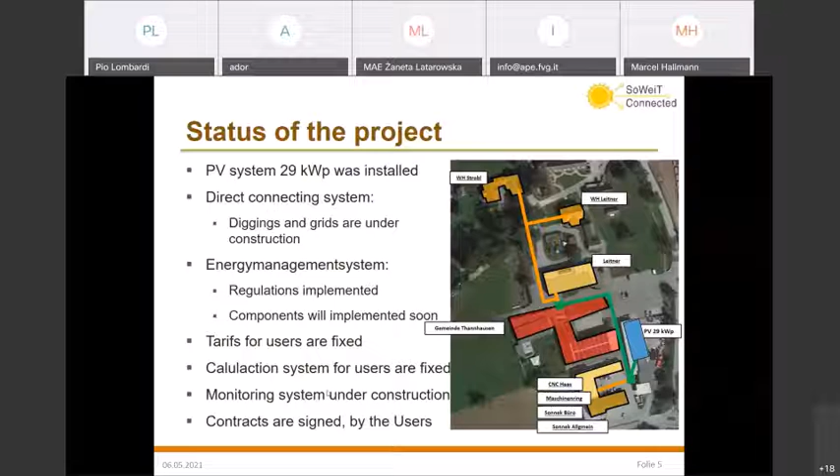What is the electricity consumption of each user, or what can they get from the PV plant? They can get about a quarter of their normal electricity consumption. For example, one company normally has an electricity consumption of about 12,000 kilowatt hours per year. So they can get about 3,000 from their own grid, and the rest of the consumption they get normally from the energy grid of Styria. So we have 100% self-use of the PV from the municipality, sharing through 7 users.

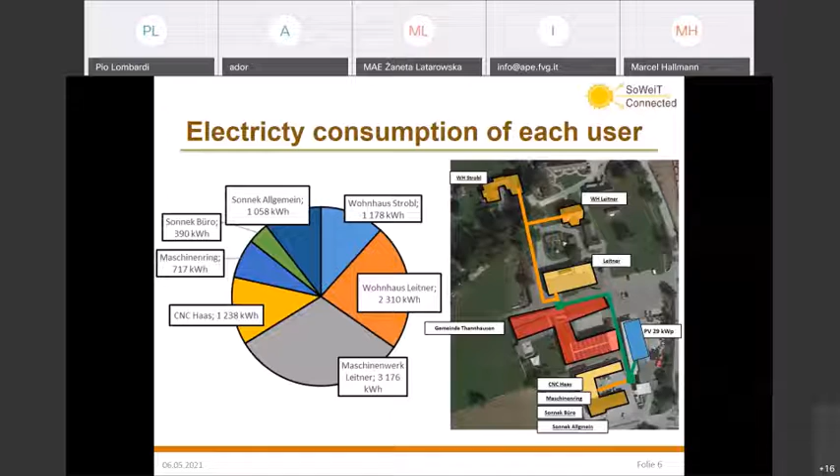The tariff which we calculated for each user will be 8.14 cents per kilowatt hour, excluding taxes, so it's much lower than they pay for their electricity coming from the official grid of Styria.

What are these savings in euros per year for each user? It depends, between 25 euros and up to 170 euros per user, which they can save per year on electricity costs. Our first idea was to have each user invest a bit in this system, but they didn't want to because the risk was too high for them. They weren't sure if the system would work, so we fixed it so that they invest nothing and get this 8 cents per kilowatt hour from the system.

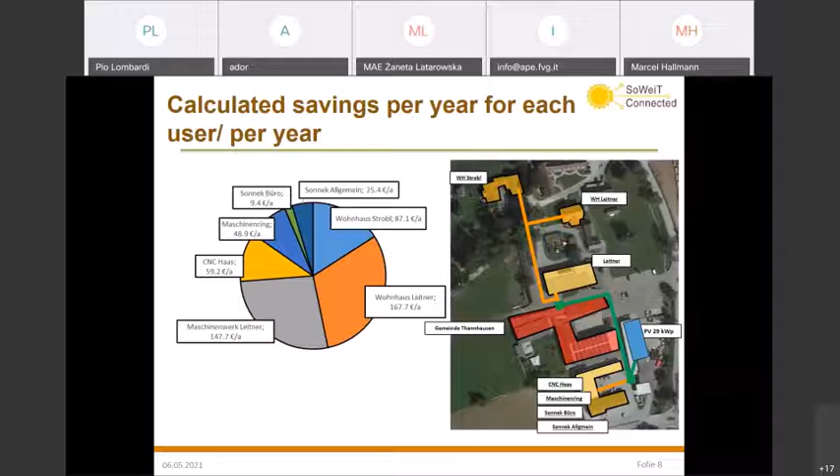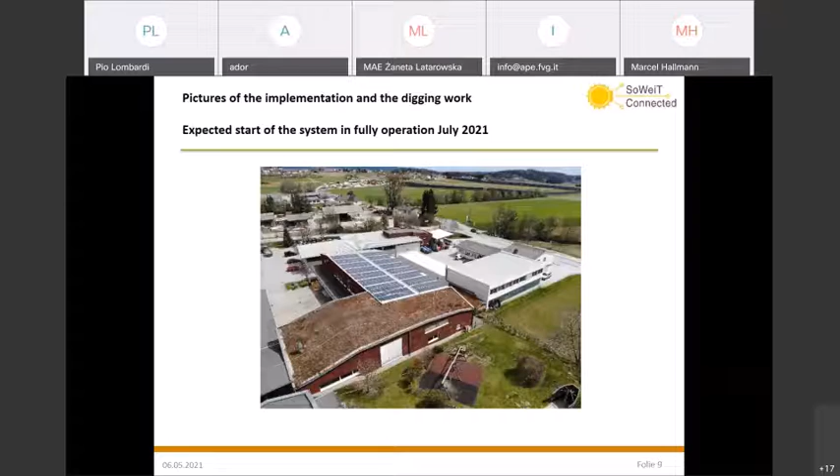Some impressions from the Thannhausen area, the PV system and the diggings. Now it's finished. We also have water lines, district heating lines, and glass fiber cable, which were also connected to the households through this project. In the next picture, it's at number 7, because every house has its own grid coming from the PV - 7 own grids to each user. That is the law - you have to provide each user their own grid from the PV to their households.

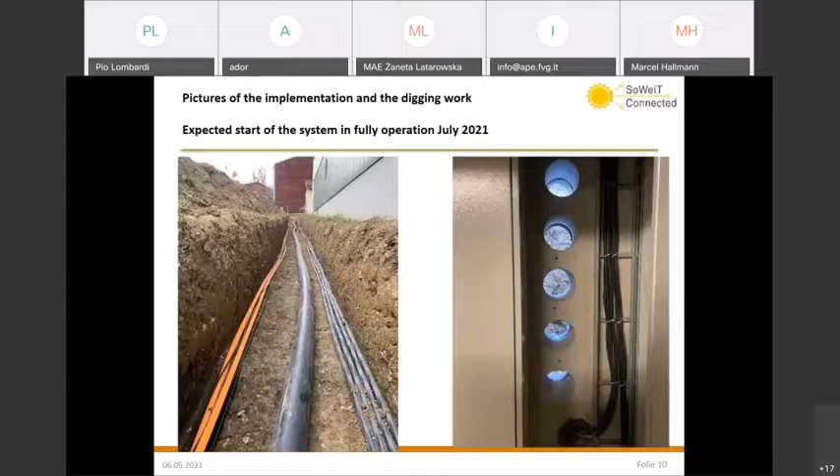There you can see the PV panels and the new 29 kilowatt peak system, which was finished 2 days ago, and we hope to get it into full operation by July 2021.

One of the main aspects that interests investors or users who want to install a storage system is the business models - which kind of business model may be developed for storage systems. This presentation deals with that. First, I'll give you an overview of why we need storage systems. I think that's obvious.

We know that in Europe we aim to decarbonize the power system, meaning we will generate electricity, but also other energy forms like gas or heat, using renewable energy sources. Most of them are volatile if we consider wind and sun, and therefore integration into the energy systems - electrical, thermal or gas - is not so easy because of that volatility.

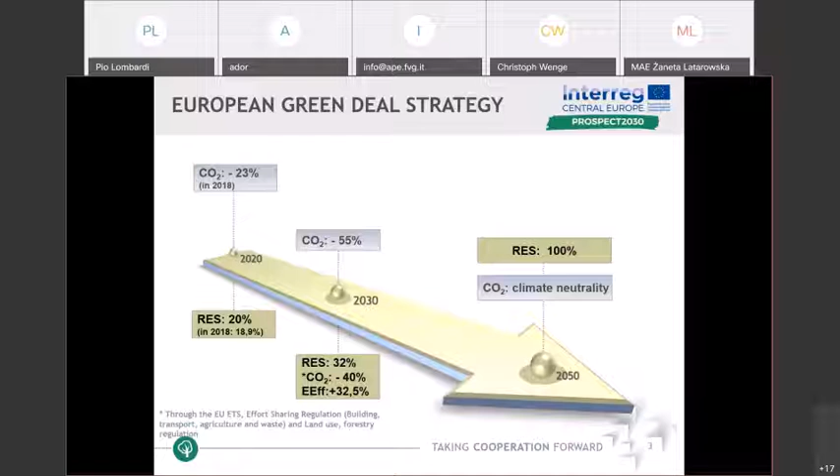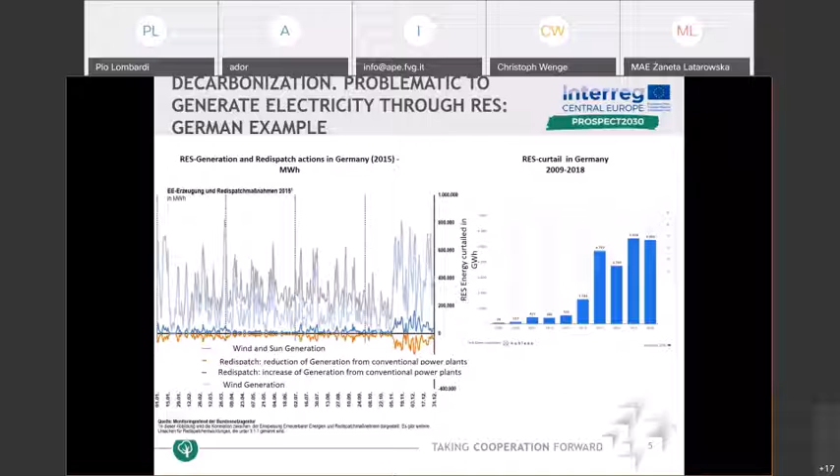Therefore, the idea is to use storage systems for storing such amounts of energy which could not be integrated, and to avoid using conventional technologies in this case, because by 2050 we will not have any more conventional technology for integrating or compensating for the volatility from wind and sun.

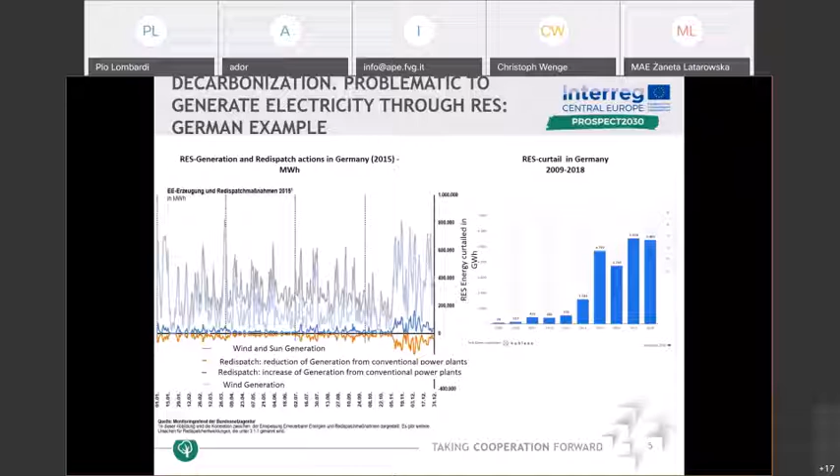So, among the scientific community, we have three solutions that are mostly researched. One of them is to have active consumers, which means consumers, mostly industrial ones but also residential, which actively participate in the integration process of volatility, which means that these consumers have to change their consumption behavior depending on when the power is generated from renewables.

Another solution may be the multi-energy system, so having a holistic approach of what energy means: integration of the electricity network, gas network, mobility network, heat network, all that should be integrated as one very large system. And the last one is the integration of a storage system. Of course, the storage system may be part of a multi-energy system and may also be used for active consumers.

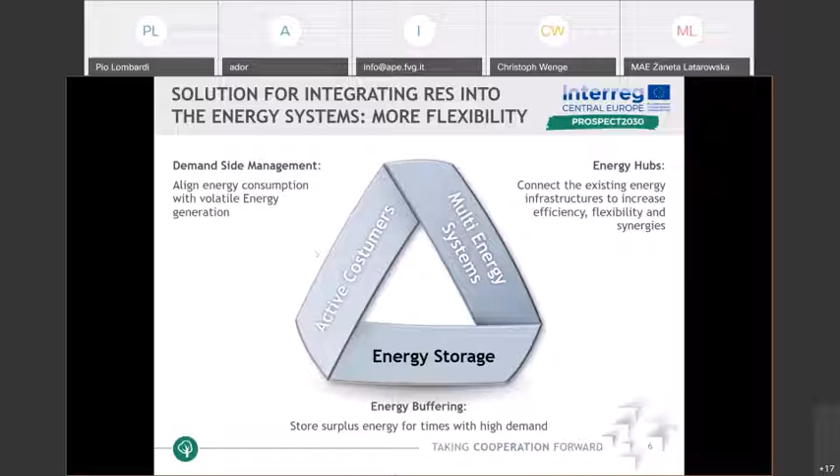So generally, storage systems are classified according to two criteria, namely the energy that they can charge and discharge and the power that they have. According to this charging and discharging power and energy, there are mostly two applications. The first one is power application, which means I use a storage system for supporting the grid operator to keep the network stable or the frequency near the set value, or energy application, which means that I use a storage system for storing a high amount of

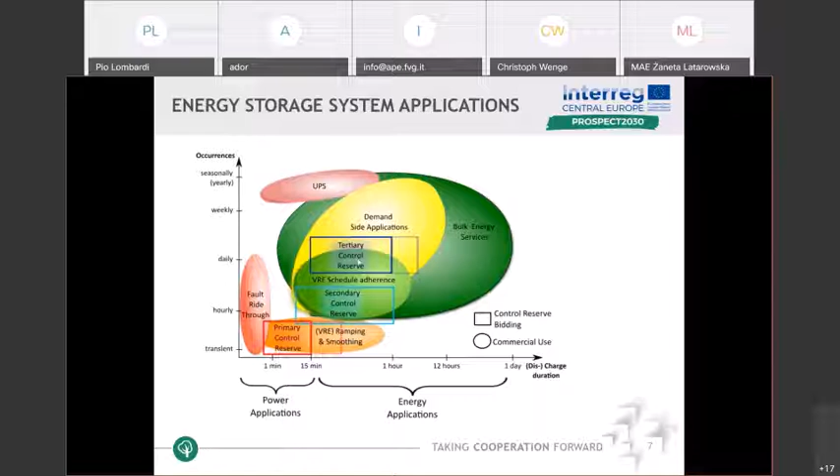energy that I cannot integrate in the grid at the time in which I could generate more energy, and I discharge this amount of energy at the time that I don't have enough generation from renewables. And you see here many sub-applications that can be applied, like demand side management, bulk energy services, tertiary control, primary control, etc.

Among storage systems, we have the first one, which is the most used technology, pumped hydro storage. Such a technology is mostly used worldwide. It's also old. We have several gigawatts of installed capacity. However, at least in Europe, we don't have any more large spaces for installing new pumped hydro. And besides that, the social acceptance of the population is not so high. So therefore, at least in Europe, installing new pumped hydro is very limited as an option.

Another technology which we may use is the compressed air storage system. We have worldwide two such plants, one in Germany and another one in the US. Both these storage plants are using the diabatic compressed air storage system, which means that I compress air, consuming electricity, of course. I store air inside caverns, and when I have to discharge and generate electricity, I also burn fossil fuel. This is the diabatic application.

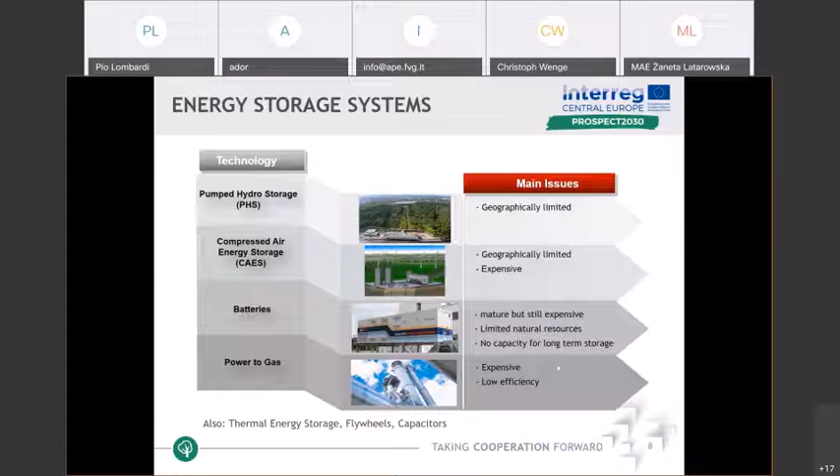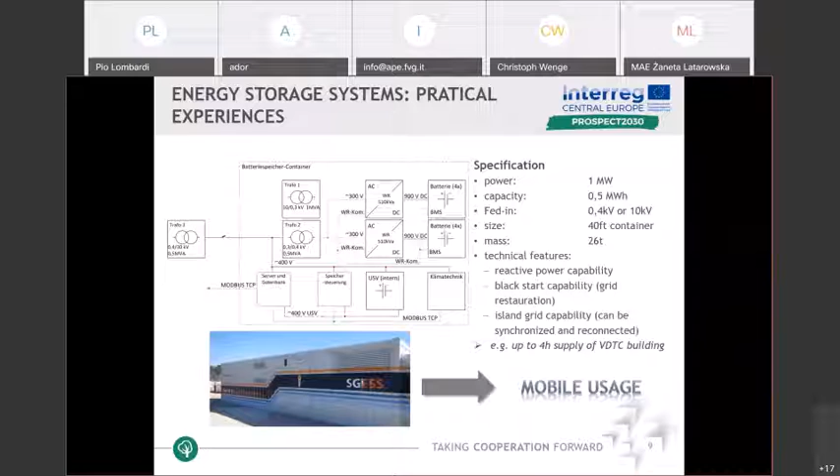So which kind of business model can we imagine for batteries? At Fraunhofer, we bought many years ago a large battery with 1 megawatt and 500 kilowatt hours of energy capacity. Such a battery may be connected at two different voltage levels. And we have used such a battery in different practical applications. From that, we have learned whether a business model may be exploited or not.

One of them is here in Neuhardenberg, which at that time was the largest European photovoltaic plant. You see here, it is near an old airport. It had an installed capacity of about 150 megawatts. And for this photovoltaic plant, we have integrated our large battery, so 1 megawatt, 500 kilowatt hours, for different applications, which I'm going to show you now.

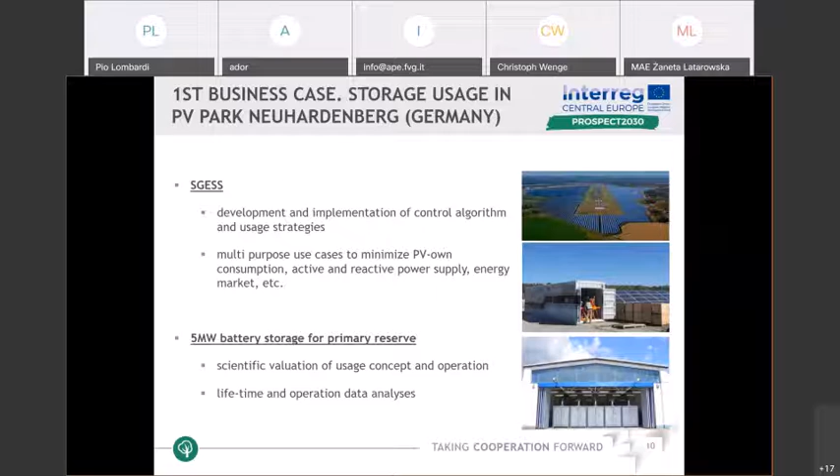So the idea was to use the battery for supplying electricity during the night. You have to imagine that this very large field also needs cameras for security purposes, for observability purposes, for controlling, and such cameras need a lot of electricity, summing all the cameras that they have. So the idea is to store the electricity during the day in the battery and supply the loads during the night. It was the first application.

Now, the second application was at the network point where such a photovoltaic power plant is connected. The system operators many times have to curtail the generation, so the power plant could not feed into the grid. So the idea is, instead of controlling the inverters or the power plant and cutting the power, they charge the battery. So the system operator does not receive the power as predicted, and the power, instead of being lost, is charged inside the battery.

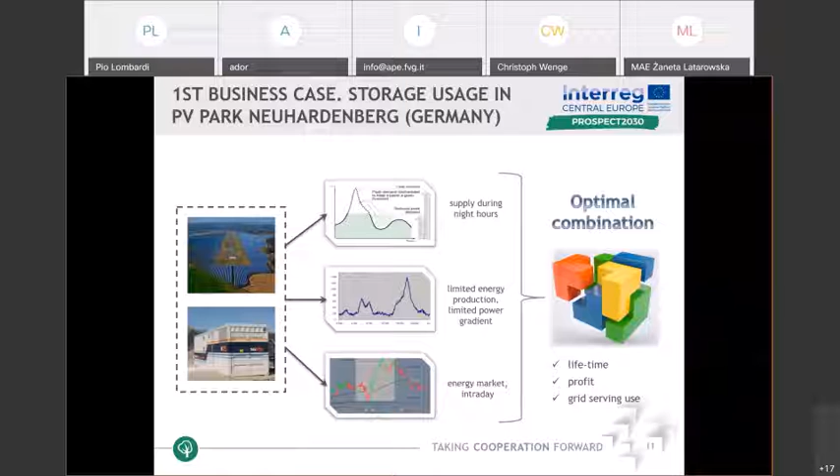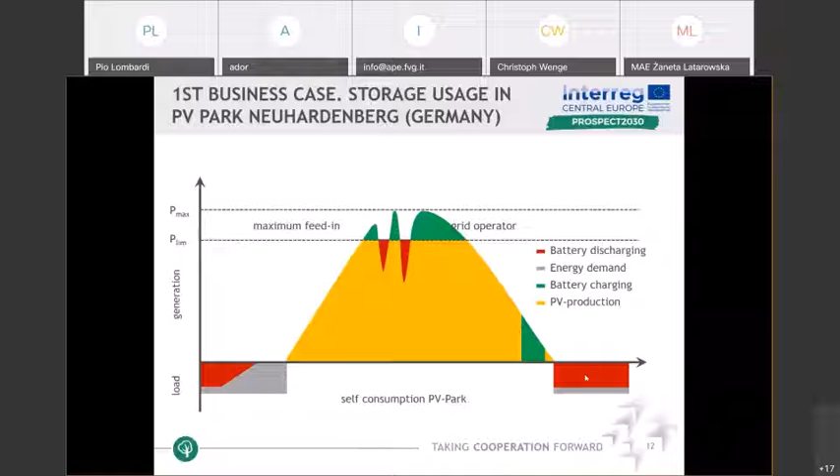So here you see just the idea of how it works. If the system operator is not able to receive power, the surplus which could be generated is charged. The power before sunset is charged for the night application, and this is the main idea. So for that example I have shown you before, the photovoltaic plant had not invested in the battery. These three business models were not so attractive from the economic point of view to justify an investment. Not yet.

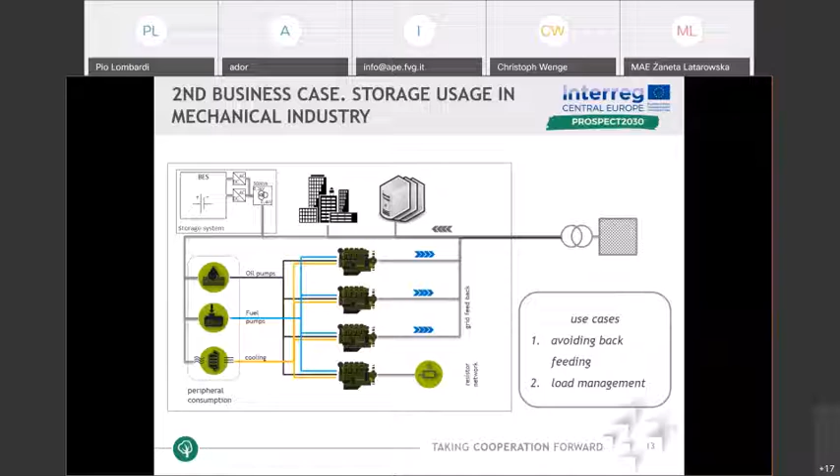Another business case that we have also investigated is the utilization of a storage system inside the mechanical industry. This is the example of an industry which tests large diesel generators for heavy duty applications. They make this kind of stress test in order to understand the robustness of the diesel generator. And the idea is, instead of wasting the mechanical energy into heat, to convert the mechanical energy into electricity and store it inside the battery. So this kind of application, which seems interesting from the technical point of view, has not been interesting from the economic point of view, and has not justified the investment in the battery.

The last one which may be interesting, which we have investigated from the theoretical point of view, is the business model called sharing economy. What does it mean? It means that if I have different users, which may be industrial users, commercial or office users, or generation companies, located near the same place, I can install a storage system which may supply different services for different users. The idea is I share the investment cost among the users, and my applications increase. So I have more applications, and therefore I may generate more revenue and more profit.

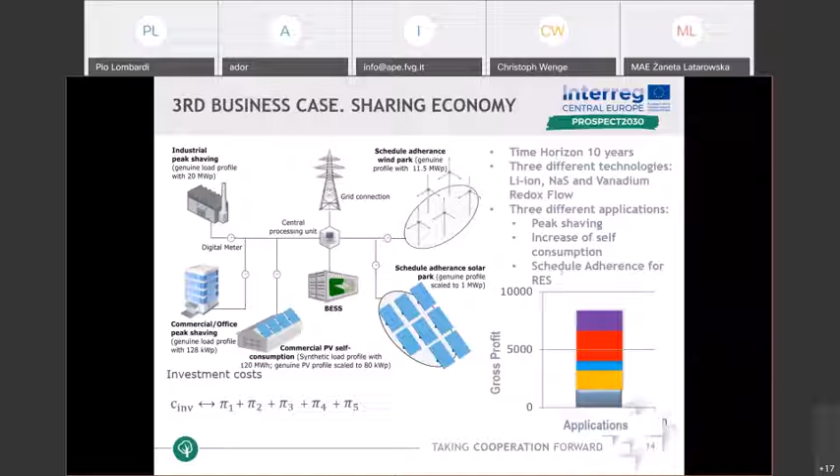So we have investigated 3 kinds of battery: lithium-ion, NaS battery, and vanadium redox flow, with a time horizon of 10 years for 3 different applications: peak shaving for the industrial consumer, increase of self-consumption for the office commercial one, and schedule adherence for the generator. It means that I improve my prediction in the day-ahead market.

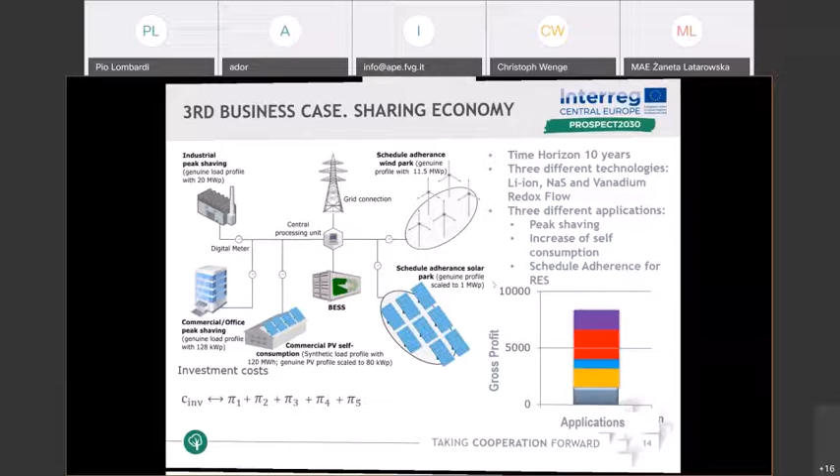For this one, you see that, for example, if I am an industrial application and I just use my battery for peak shaving, I could generate a revenue of about 9,000 euro. But if I share the investment among all the other users without giving priority to peak shaving, I also decrease the revenue that I can generate. But if I control the storage system giving priority to peak shaving, you see that the possible revenue from the same battery increases too.

Now, if you analyze from the point of view of the generation company, as I said, we have here wind and photovoltaic, and we consider just one application, namely to improve the adherence of prediction.

I generate a revenue of about 17,000 euro per year. And in sharing economy, without giving any priority, the revenue increases to 20,000. But if I give the priority for using the storage for this application, the revenue increases up to 27,000 euro.

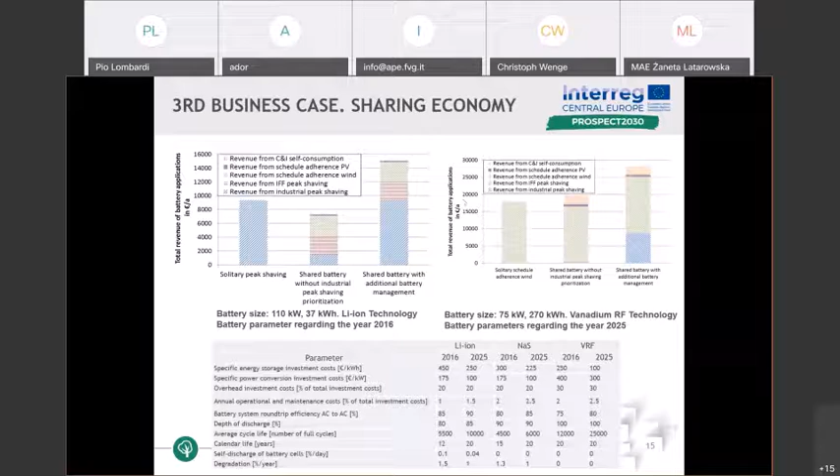So you see here also how the sizing of the storage system with 3 kinds of storage system is affected, both in the case of a single application and in a sharing economy application. You see also which kind of internal rate of return you can expect from different kinds of technologies, so NaS battery, lithium-ion, redox flow battery, or for different applications.

You see that generally the sharing economy application requires larger storage system. You see here in the power and here in the capacity. For single application, they require smaller storage system. So this is the last slide.

So just concluding, the storage system will be a key element for the decarbonization process. Batteries may be used both for power application and for energy management application. Generally, if you want to make the usage of a battery attractive from the economical point of view, you should think to develop multi applications and not just one single application, because in that case it's very difficult to make the investment of battery attractive from the economical point of view.

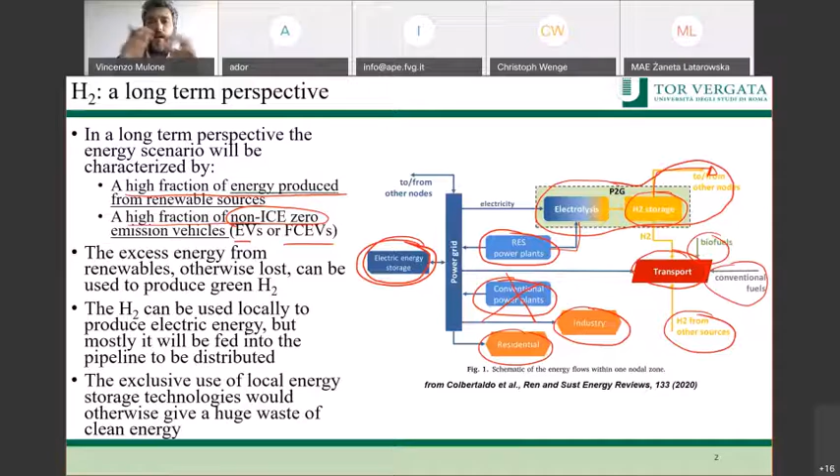So this is a slightly more complicated scenario, but the rationale is just as we thought. In order to avoid an excess of renewables, which would get into either a massive installation of photovoltaics and wind, or the curtailment, as also Dr. Lombardi was saying, hydrogen is the perfect recipe for that. Then, is this a smooth transition? No, I don't think so. It's not really smooth. But let me show you a few of the characteristics of the technologies that are behind.

So first, let me talk about large-scale projects for hydrogen production through electrolysis, which is one of the most important technologies, very clean and very efficient also, by the way. So we use water, and through the absorption of electric energy from renewables, of course, we can produce what we call the green hydrogen. The cost or economy of green hydrogen depends a lot on the cost of energy. We saw in the first presentation today the figures of the energy for the photovoltaics, which is pretty much 8 cents per kilowatt hour.

Now, depending on the technology we want to use for the electrolysis, we have different figures in terms of costs, and this depends on the current cost of the electrolyzer. So we can hardly go below 3 euros per kilogram, which is, of course, a cost which is still pretty high if compared, for example, to methane. But if we understand the advantage for society and for the strategic asset of Europe and of our countries to get into such kind of business, then we understand quite easily that this raised cost must be leveraged with the other advantages I told about in the last slide. However, these are the figures, and this is very important to figure out.

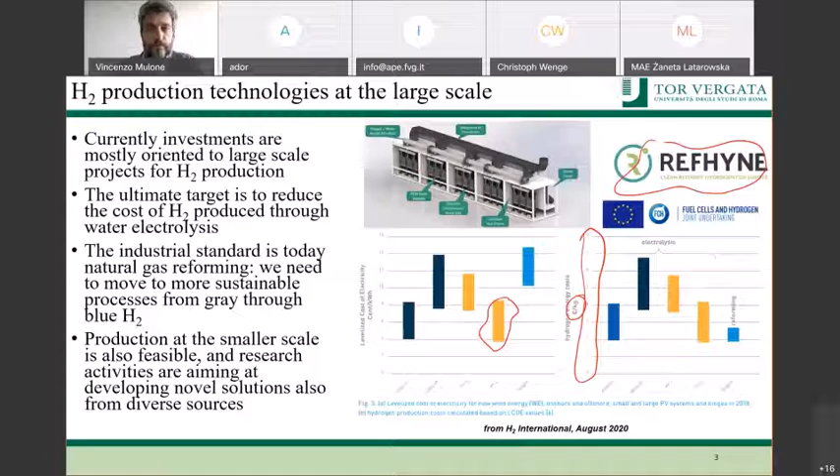This project, which is REFHYNE, is a project funded by the FCH JU, the joint undertaking for fuel cells and hydrogen. It is a 10 megawatt project, so the electrolyzer is already pretty large, and it is going to end by the end of 2022.

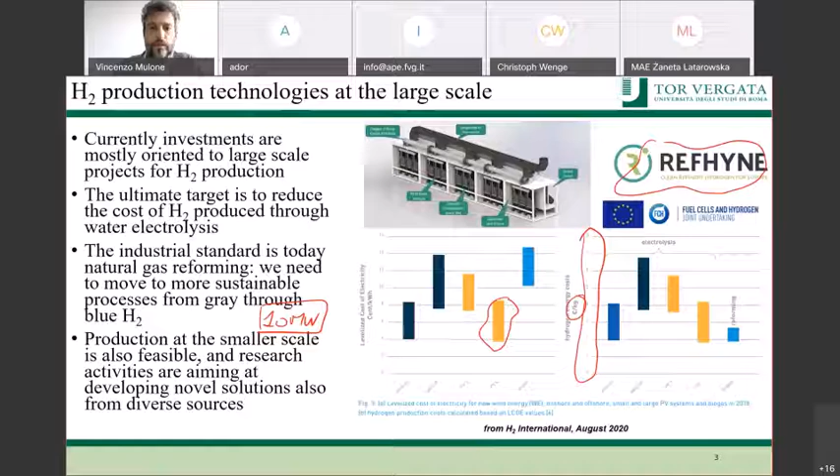But there are also other options for the production of hydrogen. One that I consider preferential is from biomass. There is the chance of producing hydrogen from biomass through a gasifier, and this is a rather simple technology consisting of a sand bubbling bed, which is fed with biomass. For example, we can think about waste, so food waste, or any other kind of waste, for example, residues of operation of factories and so forth. Then we can, of course, get into more detail about the yield we would have in terms of hydrogen.

However, the bottom line is that this technology, along with steam, so with water, can produce a mix of gas. In the figure on the right, you see with the green bar the percentage of hydrogen, which is already pretty high. So we can produce a gas under certain conditions which has 25% hydrogen concentration, which is pretty high. And then there are technologies to concentrate the hydrogen and produce a combustible mixture that is compatible with the one produced, for example, by the electrolyzer.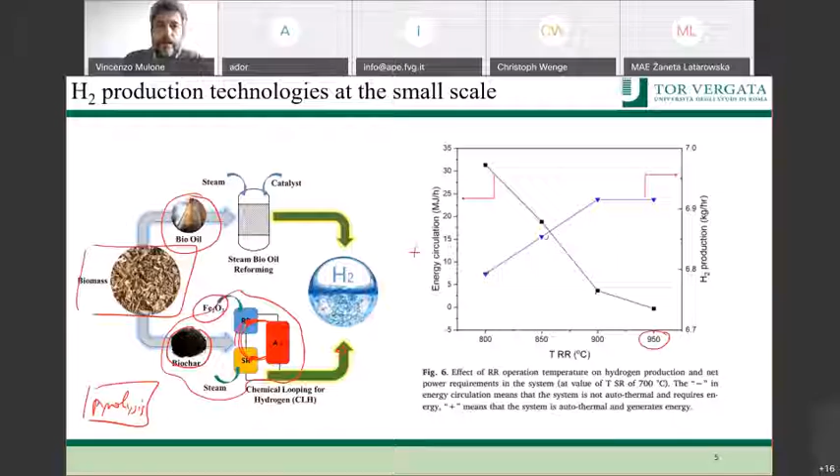Okay, talking about the utilization technologies, let me just show you a few figures of the fuel cells, and they are the mainstream technology for the utilization. One of the key aspects of fuel cells is their efficiency. They are much more efficient than a conventional internal combustion engine. The efficiency can be greater than 55%, depending, however, on the design of the fuel cell. And this can happen already at a relatively small scale, in the range of 1 kilowatt.

The problem with fuel cells is still the durability. The targets we have from the automotive application are at least 8,000 hours of operation, and for stationary systems a requirement of at least 40,000 hours. And this is still hard to attain. So this is the problem we need to solve. However, in the last 10 years, costs have been reduced by 60%. So already today, compared to 10 years ago, we have a cost for the fuel cell which is almost affordable, but durability is still a problem.

And the cut of costs was mainly due to the optimization of the use of noble metals. Platinum is a major component of fuel cells, and we learned in the last 10 years how to use a given amount of platinum much more effectively inside fuel cells.

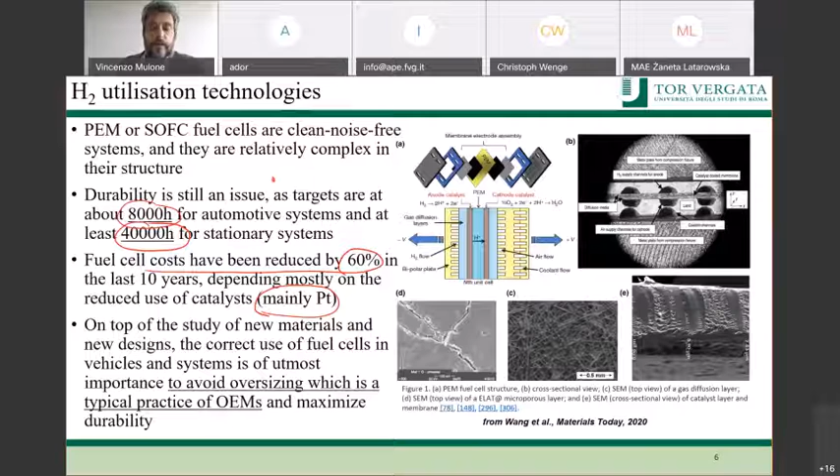On top of this, there is another aspect which is of primary importance: a vehicle, but this is also valid for a stationary system, is not only equipped with fuel cells, but also with what we call the balance of plant, or auxiliary systems that need to be optimized and integrated with the fuel cell. We're talking about the tank, a battery pack, because a fuel cell vehicle always requires a battery storage system in order to avoid early degradation of the fuel cell itself. So it's at the service of the fuel cell.

And power electronics, the DC-DC converter, the cooling system, which is peculiar as the operating temperatures are fairly low and very different from the typical temperature of a combustion engine. And of course, the electric motor, which is already developed due to the widespread use of electric vehicles today. So this slide comments on the opportunities that would arise from the diffusion of fuel cell hydrogen electric vehicles.

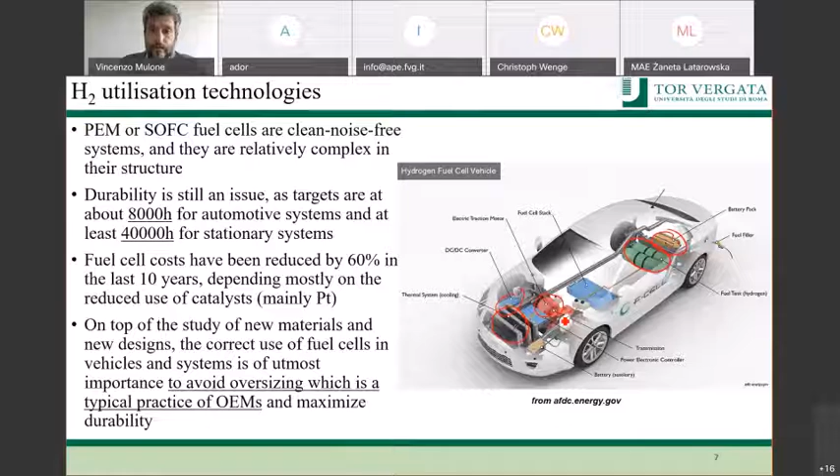What I'll talk about in the next slide is instead a stationary application, a project we developed a few years ago in the telecom sector, chosen as an application for the relatively high value of energy. For off-grid sites that are not served by the electric grid, the energy acquires a value that is much greater than the cost figure we were talking about at the beginning of this talk. So this gives room to use more sophisticated technologies to provide energy continuously at a given site during the year.

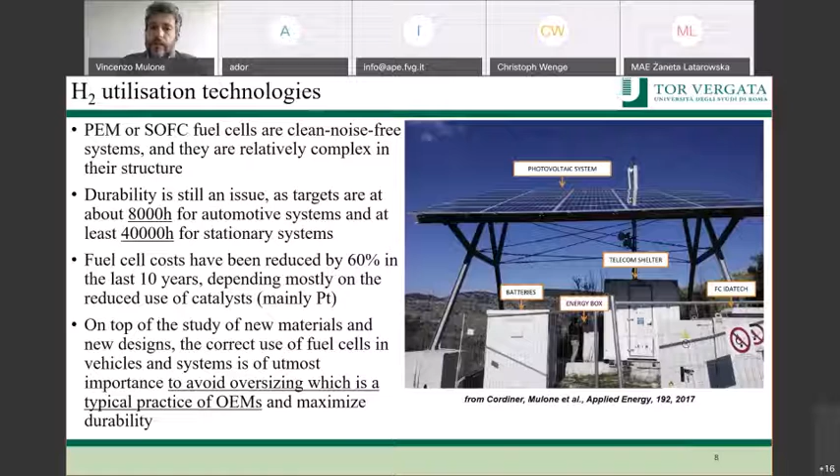Here you can take a look at the system we have right now in the lab, with a triple fuel cell stack, a hydrogen alkaline electrolyzer here, and power supply and electronic loads which are directly connected to a weather station. We acquire data and emulate a photovoltaic power plant and batteries.

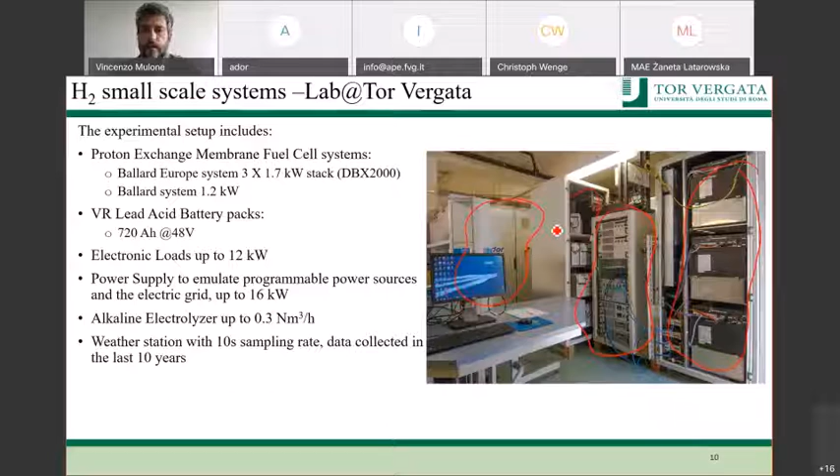So this project I was talking about was a demonstration project. It was fairly big, and we had on board two of the telecom providers in Italy, TIM and H3G at the time, and also the consortium leader Ericsson, who was providing the technology for the radio, and Dantherm, today known as Ballard Europe, was producing the fuel cells, and Green Hydrogen producing the electrolyzer.

The idea was to provide energy to the telecom radio from photovoltaics at this order of magnitude of power output. The problem is that whenever you get to night for an off-grid site, you can certainly use a battery package to swap the day and the night. But especially during the winter, you can easily run out of energy, and what you need then, as I said at the beginning of my talk, is to use hydrogen.

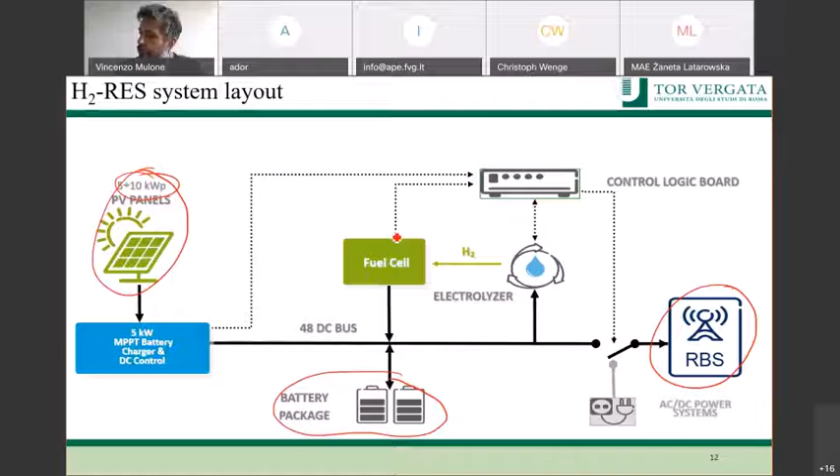So this hydrogen can be converted in the fuel cell to produce energy to be consumed at the radio. Whenever you have, for example in the summer days, an excess of energy from the photovoltaics, this energy can be used not only to charge batteries, but once the battery is fully charged, you can produce hydrogen, which is then used back in the winter days. So with this simple layout, you can easily swap the otherwise curtailed energy from the summer into the winter.

We had 13 demo sites, and we published a paper where we gave a few numerical results, more details about what I was talking about. I just want to make the long story short.

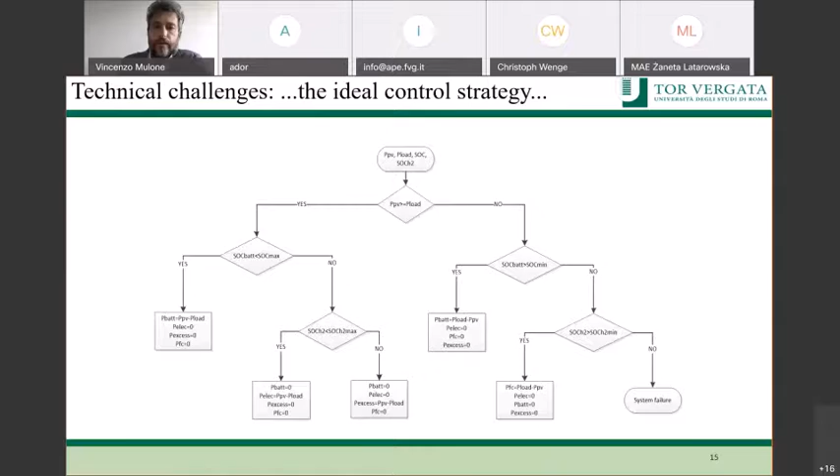This paper is a lot about the typical situation we get in a few different days in terms of the power flux at the different components of this system, which we call a hybrid system. It is hybrid because you have a mix of photovoltaics, hydrogen produced from the electrolyzer, but also hydrogen produced from steam reformer that is stored in bottles and brought to the site directly. So hydrogen is also hybrid because a fraction comes from renewables and another fraction comes from fossil sources, as the mainstream technology even today for hydrogen production is through methane with the steam methane reforming process.

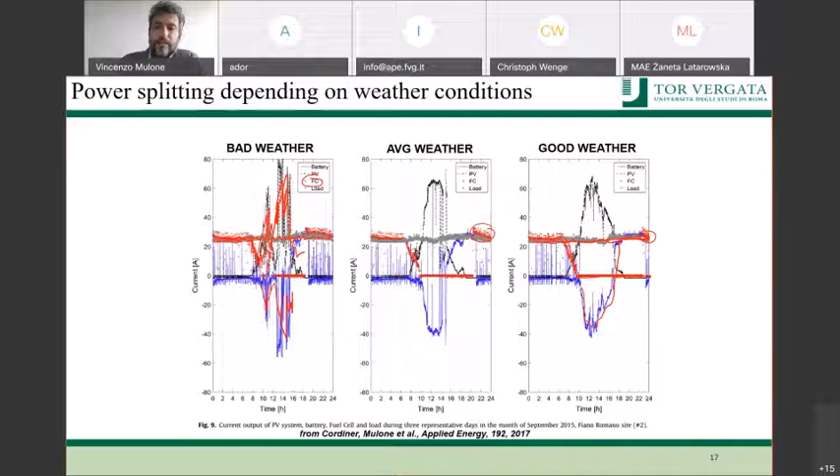So in our group we developed simulation tools that help to design such systems in order to maximize the performance. But even the definition of performance is not very easy, because, as you can read in the paper, depending on the specific site—and this is a specific characteristic of the telecom application—you have a consumption of energy which was extremely different.

For example, in these sites we had a very variable consumption of energy during the year, due to the fact that the radio apparatuses have different technologies everywhere you go. Depending on the specific site, we had to design the system in a completely different manner, and again, the simulation and modeling tools were very, very useful.

What we understood was written in the paper, but I don't want to give away too many details about this, since I don't want to spoil the presentation.

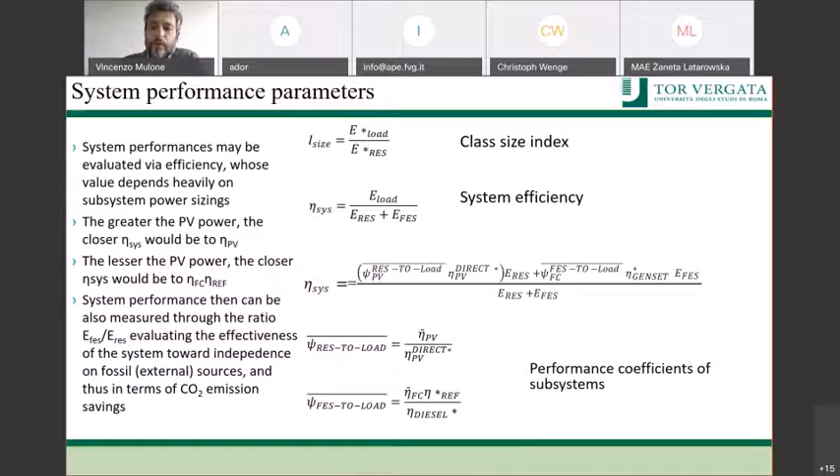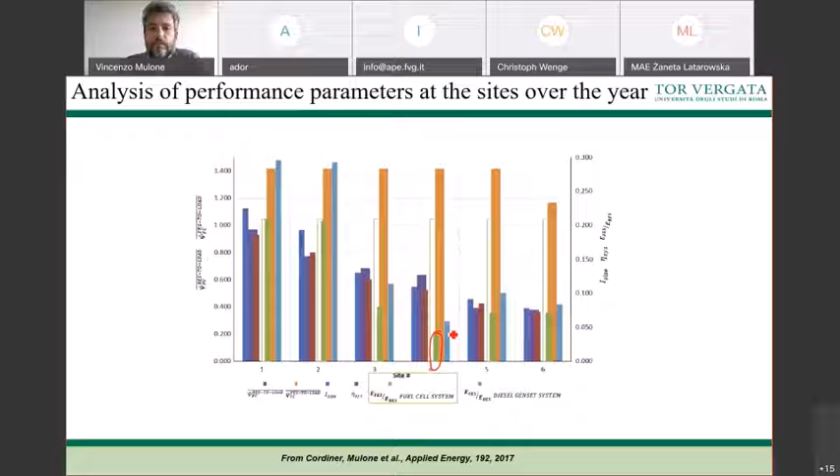We needed to understand better how to compare systems characterized by different energy consumption. We found a few results telling us that, for example, in this case, site number 4 was consuming the lowest amount of fossil energy sources, but among these 6 systems, there's no one with an electrolyzer.

Adding the electrolyzer was actually a chance to consume even less fossil energy sources during the year. So with the electrolyzer, and this is quite obvious, however, if you design it correctly, you can practically use energy which is completely green at the site.

But this is more expensive than instead getting rid of the electrolyzer and bringing the hydrogen to the site, which is all the other 6 cases, over which, like we said, case number 4 is the best case in terms of decarbonization.

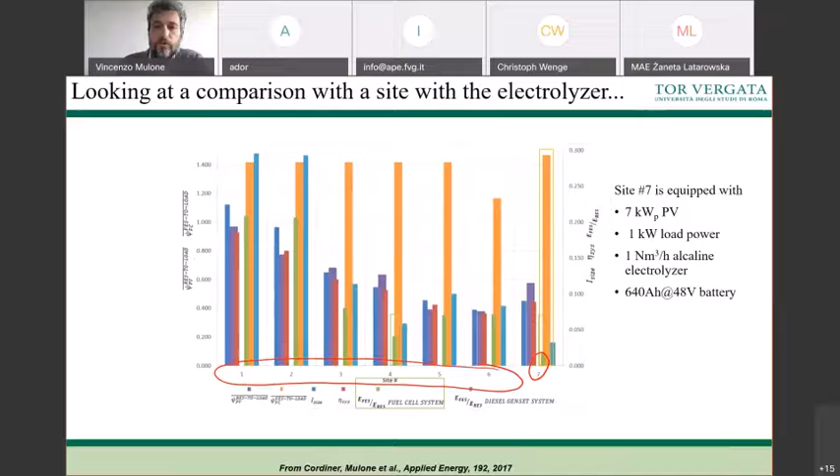Now, just to end my presentation, I wanted to get back to economic figures, since one of the main outcomes of the project was to detail a cost scenario, so a business model. And what we understood was that the hydrogen fuel cell systems...

The hydrogen fuel cell systems, if compared with the diesel generator, which was the mainstream technology to provide energy at an off-grid site for telecom applications, were much more expensive at the very beginning. But then it came back quite neat due to the fact that the fuel cell efficiency is much higher than in the case of a diesel generator, which is a small engine and fairly inefficient. So we could get the break-even very soon.

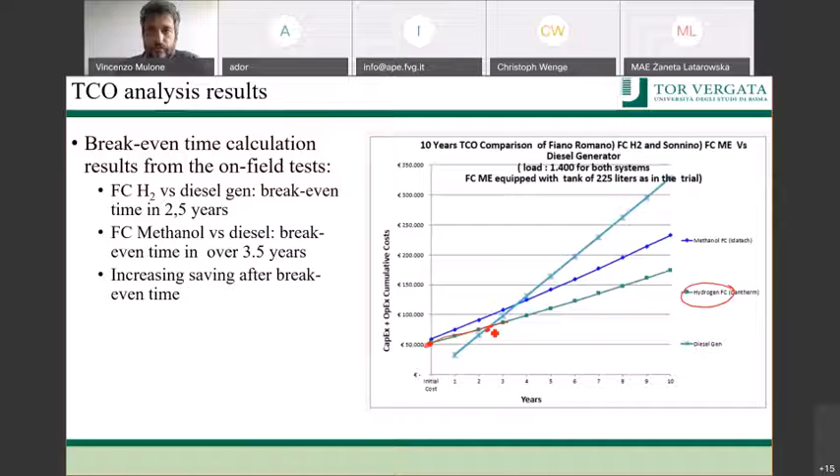So the bottom line is that if you need cost effectiveness, then the production of green hydrogen is not really the choice in this case. But if you want to prove decarbonization and maximum effectiveness in terms of decarbonization effect, then you can consider the electrolyzer without spoiling the cost too much. The break-even at 5 years is still almost quite sustainable, I would say.

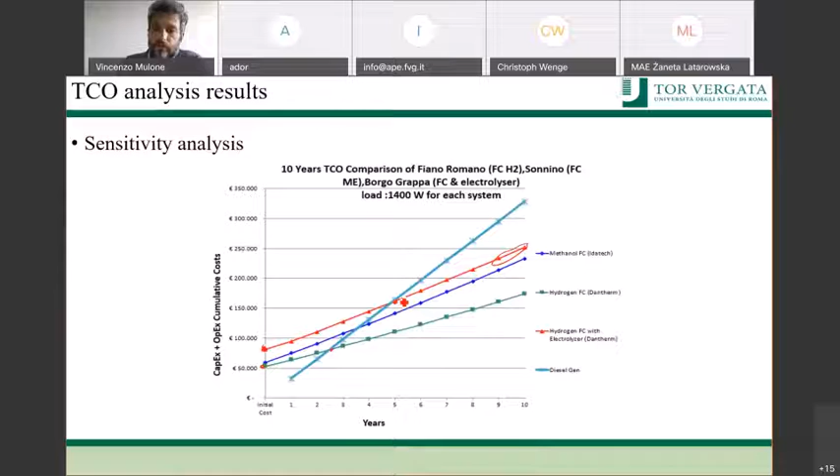Other projects we are running on hydrogen include I2Rail. It's a project we have been funded with by FCH JU last year, and we are retrofitting a diesel locomotive with a fuel cell system. This is a very thrilling project where we provide support for the design of the solution and of the fuel cell, with the hydrogen storage tanks, the cooling system, and all the balance of plant. We are very proud of it, of course.

Hopefully this will also help with the decarbonization of the railway sector, which is very peculiar because diesel locomotives are still a considerably high fraction of the fleet all over the world, if you think about all the different countries where railways are developed, and the very different infrastructure and distances in countries other than Europe.

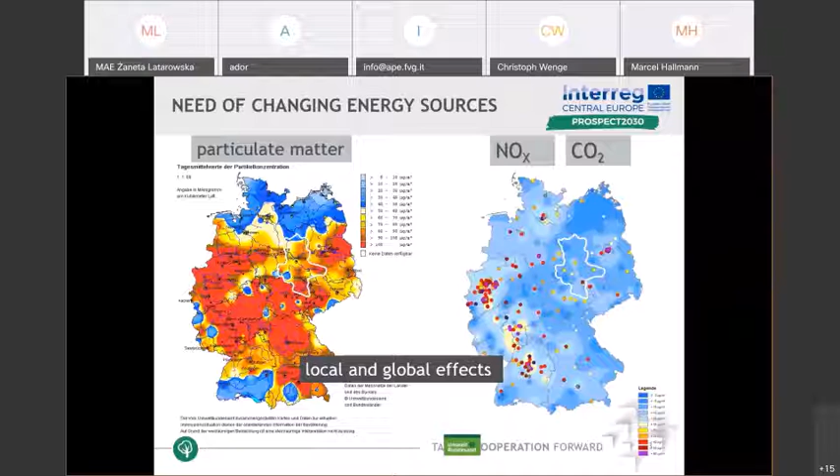I think it's quite clear that we have local and global effects which motivate us more and more to change from conventional energy resources to regenerative energy resources. E-mobility is one aspect because the mobility sector contributes a lot to particulate matter, NOx, and CO2 pollution in big cities and surrounding areas. This causes different effects, from climate change to sicknesses of people who are inside this environment.

The regenerative energies, as we've seen before, their generation is not available all the time. And if e-mobility comes through, we have additional big load inside the grid, which is also volatile and can stress the electrical grid.

We see in the numbers that in the last years, the amount of different electric vehicles and plug-in vehicles on the market is increasing. If you look at the future numbers, we will have about 128 different models with electric traction. This shows us that there's a lot happening.

The question with electric vehicles is not only to have the traction electrified, we need regenerative energies, which I will show later, to combine regenerative energy generation with the demand of charging electric vehicles.

We can also see the number of electric vehicles is increasing, though it's not that high right now—1.2% are plug-in hybrids or electric vehicles in Germany. But the number is increasing a lot due to the market situation, with different models available. When talking about these vehicles, we have to talk about the challenges of charging them.

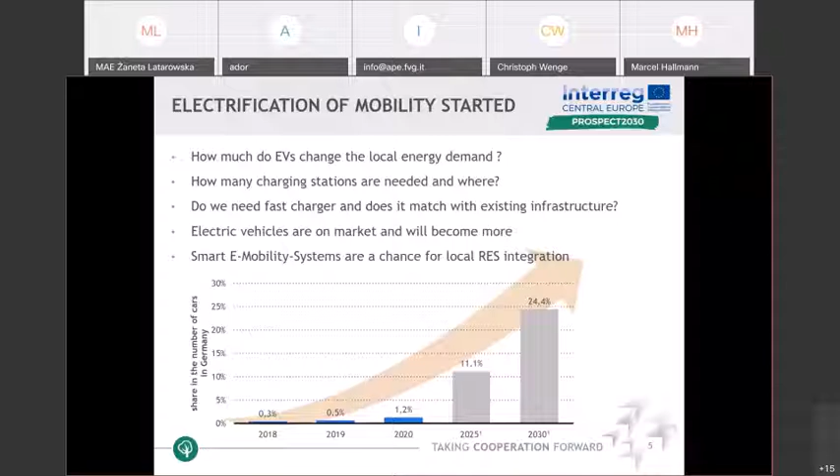So the priority is to always have the possibility of mobility. You can't cut corners or accept additional charging times or limit the availability of mobility. So there are questions that appear, and the number of charging stations is increasing too.

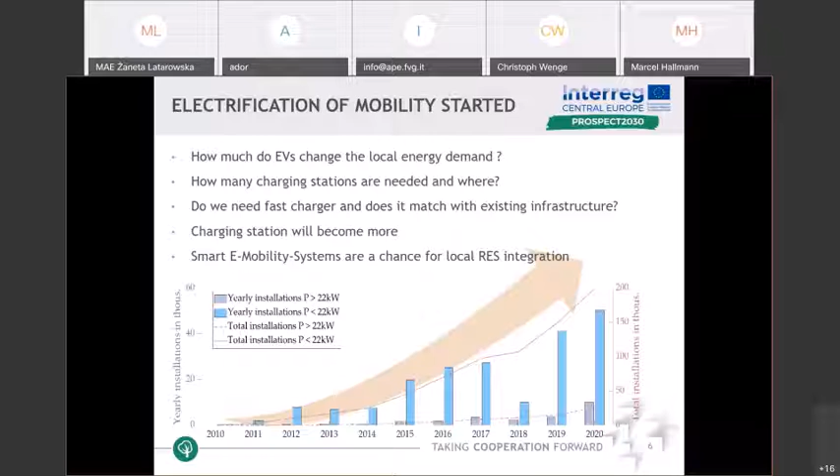The two biggest questions and challenges are, like I said before, the charging station: where do I place the charging station, and what is the demand for charging stations?

For this, you can define the general questions we had in our different projects. How is the range of the electric vehicle? That was the first question to fulfill the tasks I have.

If I look at logistics companies, or even projects we have now electrifying ambulance cars, then you have a high priority of mobility for these vehicles. That means they have to run and at least fulfill the requirements for their work. To do this, you analyze the fleet.

How and where can I charge is the next question. If I don't have a central place where I can charge them after use, I might have to charge during my tour or trip with the vehicle.

What charging infrastructure do I need is a very big question because of the investment. If I'm thinking about 50 or 20 cars and considering fast chargers, this very quickly exceeds the limits, the capacity of the electric connection of the location.

The more advanced and interesting question is: what potential do I have for additional integration of the electric vehicles? Can I combine them with my system, which we saw before in the presentation? That means combining them with PV, maybe with local generation, pumped hydro, and how can I connect them to the infrastructure? Also a very interesting topic is whether I can provide ancillary services with my electric vehicle.

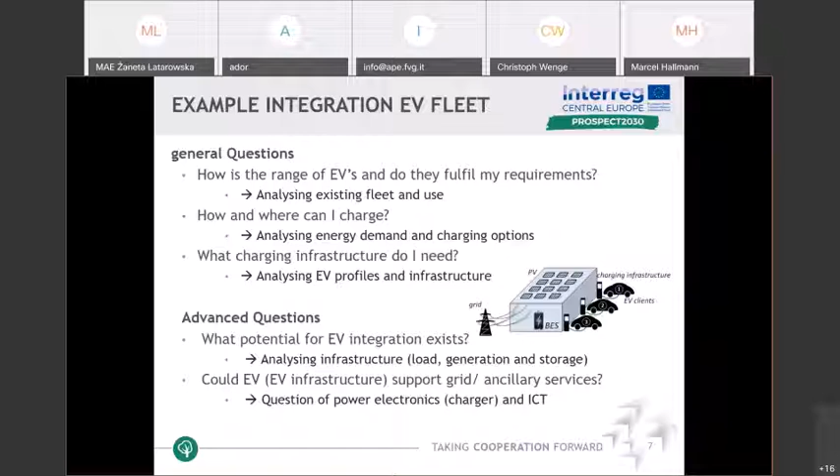We have projects on this too. What is necessary for this? Of course, one electric vehicle might not have that big an effect, but if I look at fast chargers with 50 kW and more, or if I look at an EV fleet, then I have a capacity which I could use in the grid.

I will hurry a little bit on this. I think I have said already, you have to make the analysis, meaning general fleet profiles. So we made this with GPS trackers in different projects. Then you analyze the load you need on the vehicles, the distances, the time to charge, and so on. And at the end, when you have all these data sets, you can make profiles, as you can see small over here. And out of these profiles, you can look where the gap to charge is.

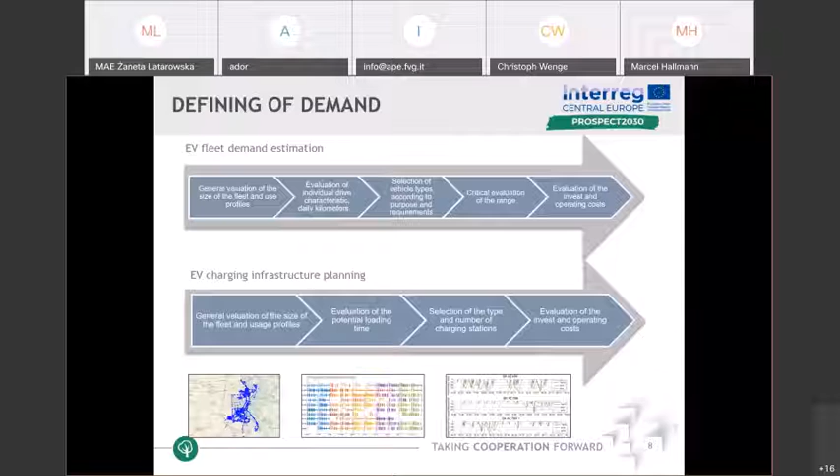And you can see what flexibility I have in my system to use my electric vehicle as a storage, as a flexible load. If I look at future technologies, which we have in other projects too, maybe I can even use my vehicle not as a flexible load, I can use it as a full battery. That means I can feed energy back into the grid. And maybe I'm even able to do this phase selective. That means I can look at which phase's line capacity is already full, then I just change to another phase of the electrical AC grid to fully use the capacities.

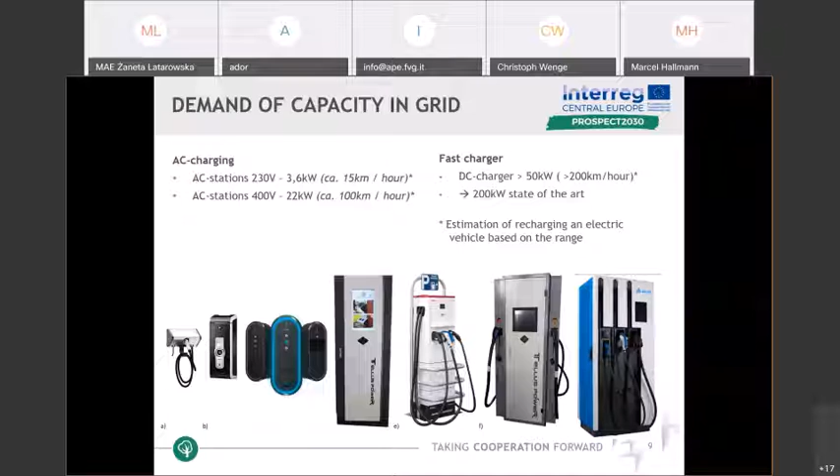Fast overview: we have the question between the fast charger, which is more than 50 kW, and the slow charger. This will be the standard electric grid, single phase or three-phase system. And I just translated this here. You see, standard is like 15 kilometers an hour. You can charge with 3.6 kilowatts. And this will be 100 kilometers you can charge in an hour. And if you have a DC charger, you can charge even 200 kilometers and more during 1 hour. Yeah, just a more or less fast calculation about the possibility.

Out of these different projects, I have just one fast example over here. We have seen in the analysis of the fleets that 90% of these vehicles in these cases had less than 80 kilometers in the tour, and then they returned to their place and they were available to charge or even to do grid services or to offer flexibilities at this place. You have a high potential for demand side management. The potential is very high to integrate regenerative energies.

In this project, we had the possibility to combine CHP generation, PV generation, and big loads because this was a newspaper and logistics company. And they had big machines over there, and they had a big fleet of vehicles. So this was an interesting combination. And then you can check and simulate this and look how much flexibility there is and what infrastructure they really need.

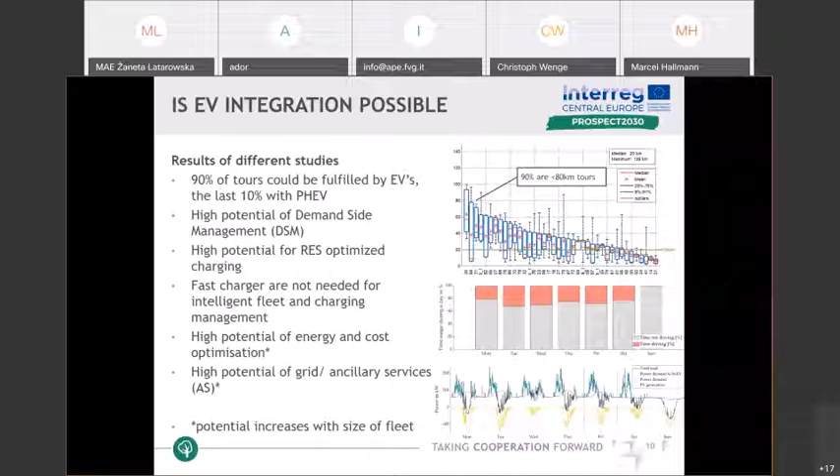A further step, which is future research, is ancillary services with electric fleets, which I'll try to go through fast. We can divide the ancillary services into frequency control, storage, and voltage control, and you have these different services under each group, which could be done with electric vehicles or electric vehicle fleets.

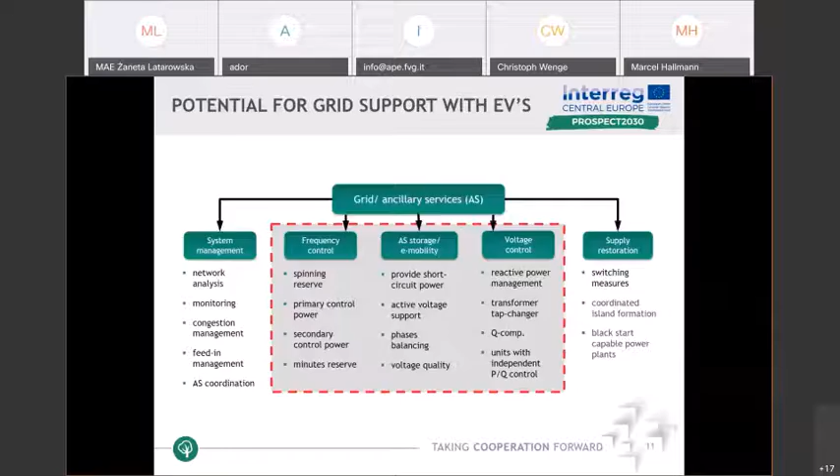For the electric vehicle, the only thing which is interesting for this service is not all these complicated components. It's actually the charger, the battery, and the connection. We have the battery system; this will be the storage. We have the charger. This could be inside the fast charging station or inside the vehicle, which is normally the slower charger, like an AC charger. And the grid. And of course, you need some other instance which is giving the information and managing everything. The managing of the storage will be inside the EV, and the managing of the requirements to keep the fleet running and the charging will be in a higher instance. And the energy flow is all depending on the charger.

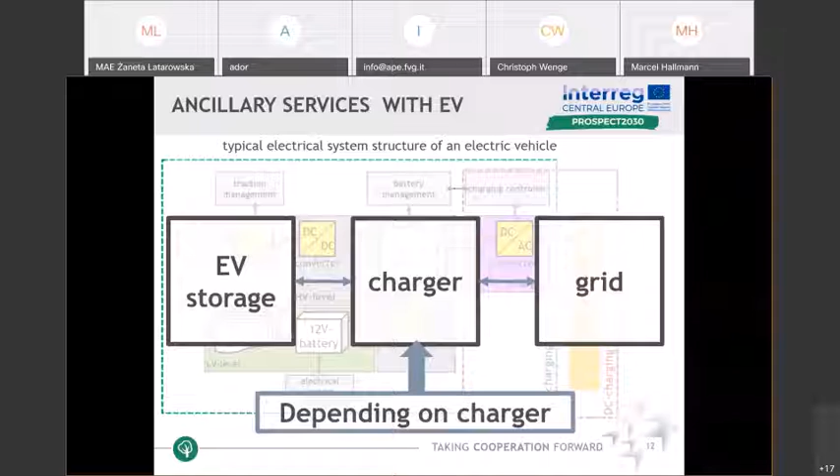So what ancillary services could I do? I won't go into detail because time is pretty low. I could do active power control, reactive power control, phase selective active power control and reactive power control, and distortion reactive power. That means you can look for high frequency distortion in the grid and compensate it. This could be done by the power electronics, and you see over here the different effects in the grid.

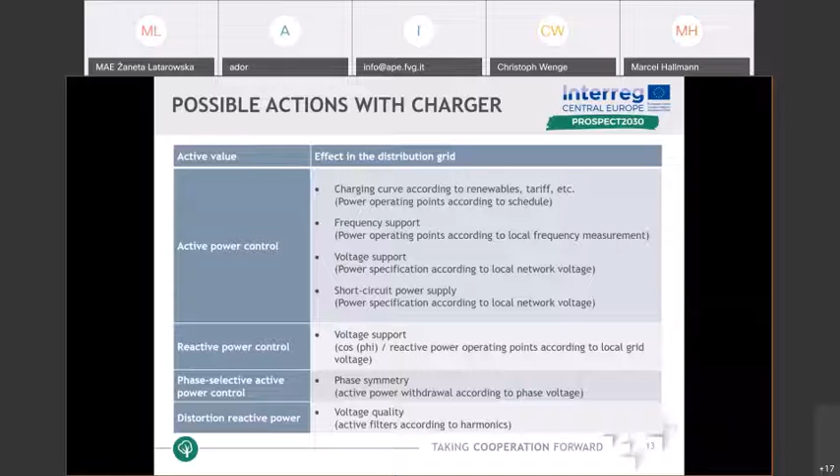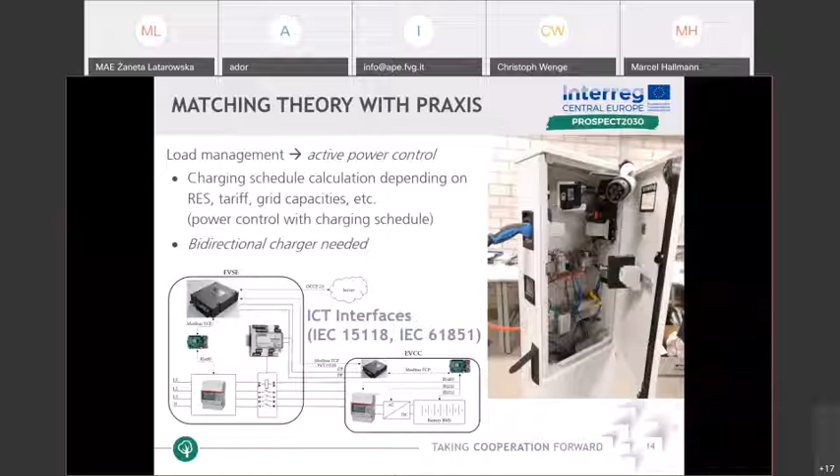In our laboratories, we have two main focuses for this. One is the hardware to fulfill the requirements, that means the power electronics, and the other thing is to combine this with the actual standards. That means you need the communication, which goes through the 15118, the high-level communication, and the other thing is that the charger has to be enabled to do these services.

The charger itself looks like this, that we have 3 single charging systems. This is one possibility for power electronics. Of course, there are other possibilities, but like this, we're able to have each single phase be bidirectional, and we can support reactive power and active power by each single phase.

At the end, we have in the laboratory the possibility to have the flexible load or storage system. On the other side, we have the grid. And then we have the communication with the actual standards and the mobility area control center, for example, or an energy management system, which could be local or global intelligence, telling the vehicles or the storages how to behave in the grid.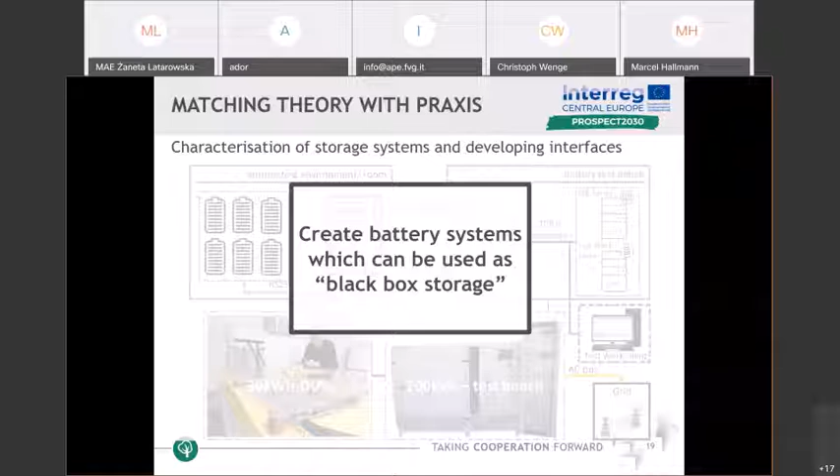For this, we have different test systems to test battery systems, to test the charger systems, and at the end, the aim is to create a battery system which can be used as a black box storage. That means all the functionalities which are not really relevant for the higher level system, like the operator, should be done in the local system, and you should have standardized interfaces to the upper level, and you have to fulfill the requirements of the grid or of the requests you get from the upper operator.

For this, you have the possibility in test benches to look at the cells, for example. This is a very interesting part. But the question is, what really happens in the cell? And we had lately an interesting project where the idea was to look inside the cell. How can you look inside the cell? This was done with fiber optics, and our partner had the measurement systems.

So you have a fiber spectrum which is going through the cell. You have over here the sensor, and then you look at the reflection on the other side. That means you look at the spectrum which is coming through the cell. In this application, you have to, of course, connect this fiber optics, which are really skinny. I guess some of you have seen this already. This is like a hair that big, and then you have to make sure there are no cracks from the installation.

And when you finally get this installation, then you don't have only the standard electric parameters, which you can measure on the clamps of the cell. You have additional information from inside the cell. And this additional information gives you the possibility to see how my cell is right now. How's the state of health, for example? How's the state of charge?

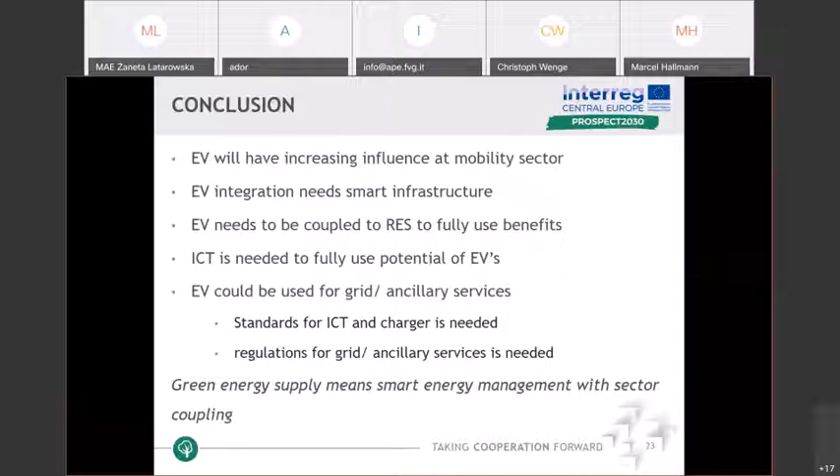Green energy supply means at the end that we have to make our energy management system smarter, and we have to couple all different sectors, which we have seen already in the other presentations. And to drop the last few words, because I'm today here with the University of Applied Science in Magdeburg. We have here also different applications, like a test bench for battery systems and an e-mobility center, where we have researched on the points which I presented already, and different regenerative energy supply like wind and PV.

And what we want to have in future is hydrogen microgrid development and a small test lab, and also bigger PV generation and newer wind generation, and combine all this to a small multi-energy grid to supply heat, electricity, power, and of course to have mobility all connected together, coupling these different sectors.